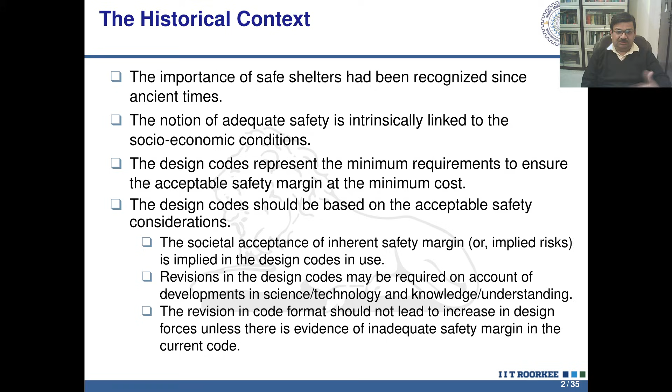So how has structural design as a concept evolved? As we know, need of shelter is as old as civilization, from the cavemen. In ancient times, the shelters were built by trial and error, and these experiences by the practitioners of the craft evolved into several rules of thumb, often based on geometric proportion, and we still use some of these rules of thumb even today. For example, the design of concrete gravity dams is still based on the middle third rule. The resultant should not pass beyond the middle third portion of the base, right? That is the no tension design rule.

So such rules of thumb have evolved over a period of time, and these rules of thumb have been codified in the form of structural design codes based on different formats. With the advancement in science and theoretical basis, formal codification took place, and that led to different design formats. For example, starting with permissible stress or working stress, then ultimate load, and the present method of limit state design.

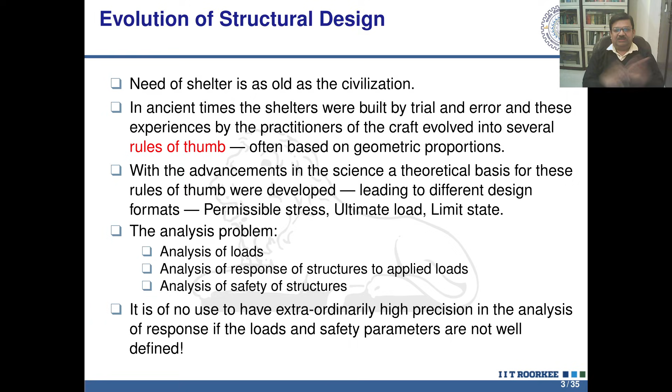So it is of really no use to have extraordinarily high precision in the analysis of response if the loads and safety parameters themselves are not very well defined. So please keep this broad framework of the state of the art in practice of structural engineering while we go along.

So the legal implications: codes are legal documents, and they are legally and ethically considered to be the minimum criteria that must be met by the design and construction community. If the owner wants to increase the safety margin, he is very well within his rights to consider higher magnitude of forces and be more safe. But codes themselves should provide the minimum that society cannot go below.

And the basis of this building code development is to safeguard the health, safety, and welfare of the public. The first and foremost goal of building codes is the protection of human life from the failure of building life safety provisions or from structural collapse. So that is the main guiding principle, that human life should not be lost. And there are two basic formats.

There are prescriptive codes that specify provisions to be incorporated to address certain specific issues. One example is our ductility details, 13920, that just mentions that the reinforcement has to be particularly arranged in this form, the spacing between the ties, how long the close spaced ties should be there in the beams and columns and so on. And it is just assumed that by doing this, somehow we will be achieving ductility of maybe around 5 or so, the global ductility at the structural level.

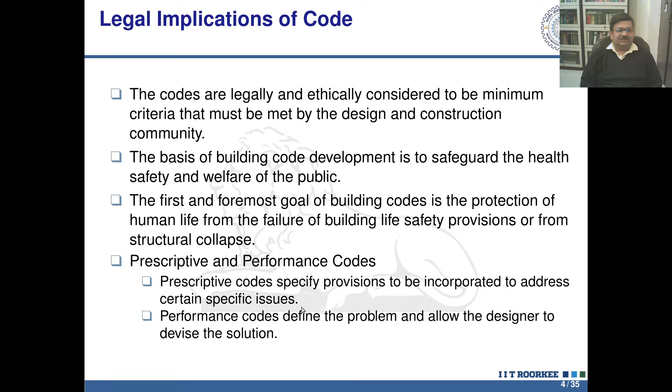And then there are other more general, more open-ended codes which define the problem and then define the broad framework, and then designers are allowed to devise their solution as long as they meet the criteria, that is, the constraints that are specified. So that is performance based codes. So now how do we go about? So safety margin, we talked about the society acceptance of safety.

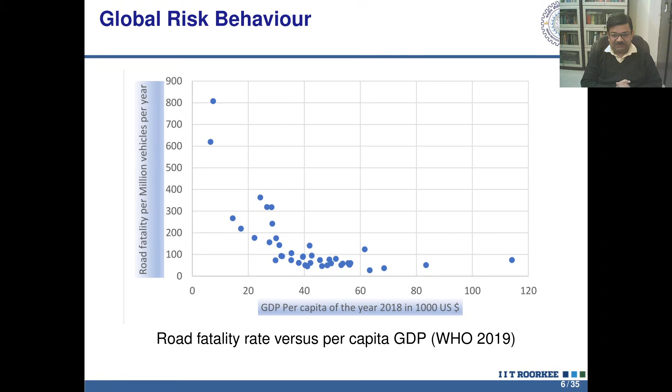And by accepting this high risk, we reduce the cost of living, which is reflected in our per capita health expenditure. Everything is cheaper. If we accept more risk, everything is cheaper. I mean, we can even get prescription drugs over the counter without giving any prescription to the pharmacist. Very common practice. I just want you to appreciate this fine point. What is the acceptance of the risk in our society, Indian society?

So now we come to the design problem. As I said, the problem is to provide a safe shelter at minimum cost to the owner. The notion of safety is, first of all, the strength criteria: factored resistance should be greater than factored load. Right? So that is the basic limit state design. And then, after we satisfy the strength criteria, we apply the service check condition that the deflections or drifts or whatever deformations should be less than the allowable deformations.

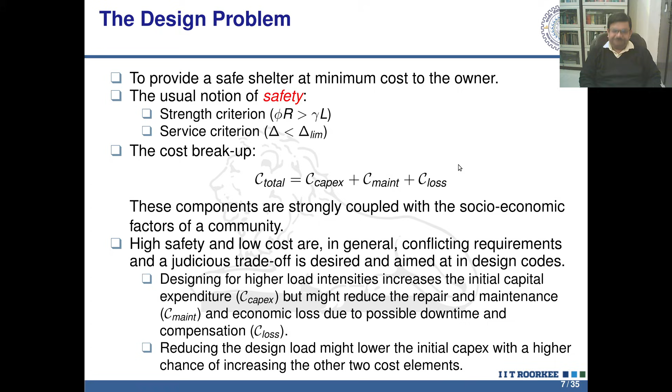Now, a lot has been made about the revision being the first step towards performance-based design. So I need to put this in context. Performance-based design, as far as earthquake resistant design goes, is essentially specifying extent of damage because earthquakes are of different shapes and sizes. So it is not possible to expect the same performance against all possible earthquakes. It is not economical. It does not make sense.

So the idea is we can specify different performance levels in the form of acceptable damage. So very frequent earthquake, no damage. Moderate earthquake, some partial damage. Very large earthquake, rare earthquake, significant damage but no collapse, and so on.

And as the facility becomes more and more critical, we make tighter specifications towards the performance in terms of damage control, controlling the damage, and essentially, damage is defined by the drift, lateral drift. So drift control mechanism. So what should be the drift measure for different intensities of earthquakes? So this is what performance-based design should aim for.

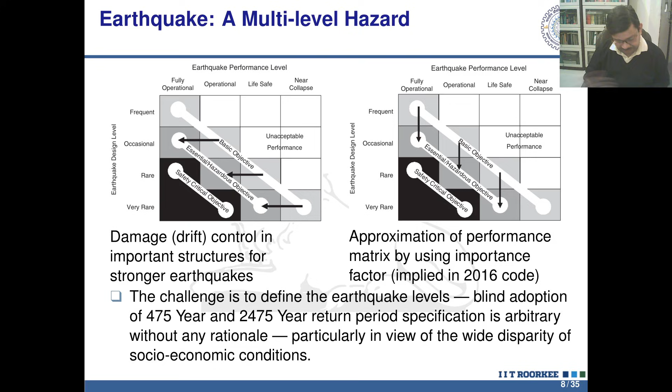So now we come to the comparison of the seismic zoning maps of 2016 and 2025 that we have. So the most obvious difference is the increase in seismic zones from 4 zones. We have now come to 5 zones, ranging from zone 2 to zone 6. And just to compare the basic seismic coefficient that we use for design for normal structures, now the definition of normal structure has also changed. That's the fine print. While normal usage of a residential building was for buildings with occupancy of up to 200 in 2016, in the 2025 version of the code, that has been limited to occupancy of only 100 residents.

So 100 residents, what does that mean? About a 4 or 5 storied building. If you go more than 100, the force levels increase by 20% more. Right? So this is for normal, so apple to apple comparison. So I'm just comparing these basic design coefficients to be multiplied by the seismic weight to calculate the design force, base shear.

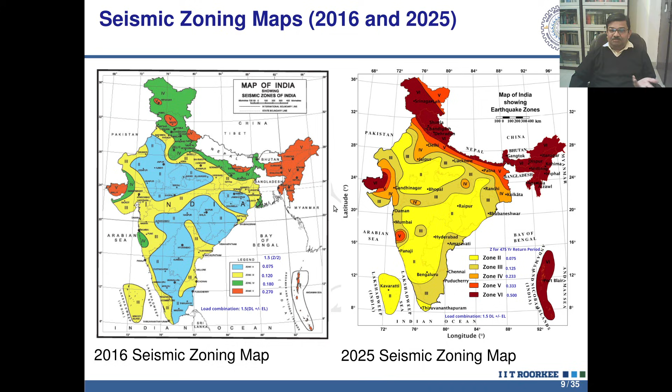And by doing this, all the buildings which have been designed according to the 2016 version of the code are now deficient. How do we repair? I mean, do we really need to repair? And who pays for the repair costs, upgradation cost, and what is the rationale for those imposing that demand?

So different intensity of earthquake hazard is now specified in terms of return periods, but the performance specification is still in strength terms, as I mentioned. So all this return period business has done is replace importance factor with return period. That's just a cosmetic change. Practically nothing in terms of performance based design.

Absolutely nothing. Performance based design requires control of a measure of the damage, measure of the drift, what extent of drift is permissible for which return period or which particular event, for different structures, configuration or use type. There is no such specification. What was done till 2016: higher forces were used to design more important buildings. Just replace those higher importance factors with higher return period intensities. That's all. Nothing actually changes on ground.

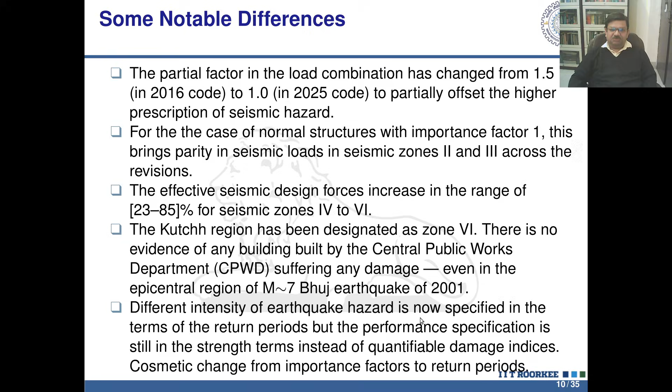So reading between the lines, seismic hazard is prescribed in terms of the ground motion parameters. When we talk about the design of the structure, what is of interest is the structural response to this ground motion. And a distinction should be made between exceeding ground motion threshold and exceeding structural response threshold. These two are distinct. That's why I will take a small detour to discuss the dynamic response of structures and how they depend on ground motion characteristics.

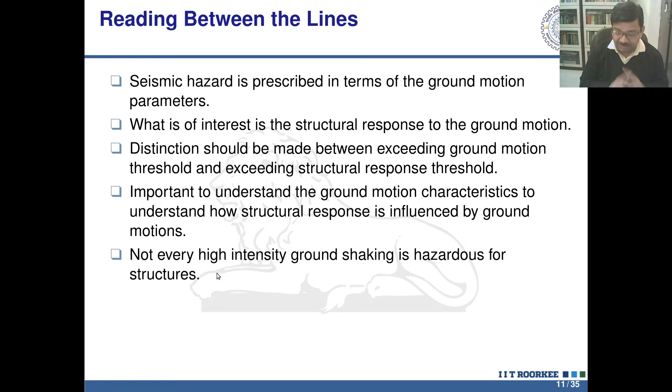So it is important to understand the ground motion characteristics to understand how structural response is influenced, and most importantly, not every high intensity ground shaking is hazardous for structures. Please note this line. Not every high intensity ground shaking is hazardous for structures.

So ground motion characterization, essentially any dynamic excitation, requires three macro characteristics for specifying the load. One is, of course, the intensity. Second, because it is dynamic loading, frequency content is also required because there is a problem of filtering. Some frequencies are more damaging, and some are less damaging to a particular structural type. And then the duration of the ground excitation. If something lasts only a very short time, the structure doesn't really respond. So persistence of ground shaking is also important. I will explain this in a short while.

These three macro characteristics are governed by the physical parameters of the earthquake process, that is the source mechanism, whether it is strike slip fault, thrust fault, subduction zone, plate margin or intraplate, and so on. The magnitude, distance, site conditions, etc. All these factors combine to generate the motion at site.

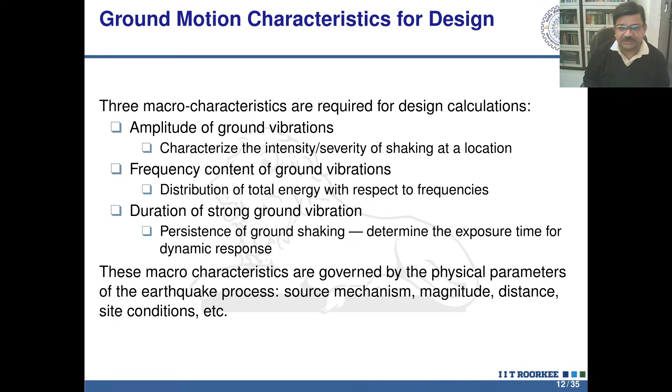So just to give you an idea about earthquake ground motion, this is an accelerogram recorded at Gopeshwar during the March 29, 1999 Chamoli earthquake in Uttarakhand. A near field earthquake; Gopeshwar is less than 20 kilometers from the epicenter. These are the three components: longitudinal axis of the instrument, vertical component, and transverse axis. While the record is about 25 seconds long, the critical phase is only about 5 seconds.

That's all. If the structure survives these 4 or 5 seconds, that's all we need to worry about. The structure will survive the rest. These are the ground acceleration traces. We can measure the peak ground acceleration, about 0.38 g in this transverse component, and a very strong lurch here. So this is a near field event. It has all the characteristics of near field ground motion, strong pulse behavior, and so on.

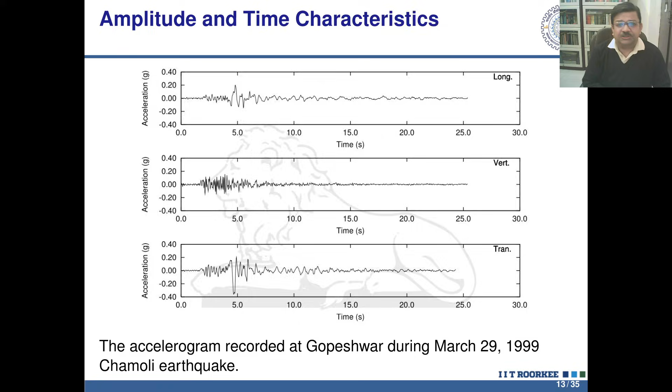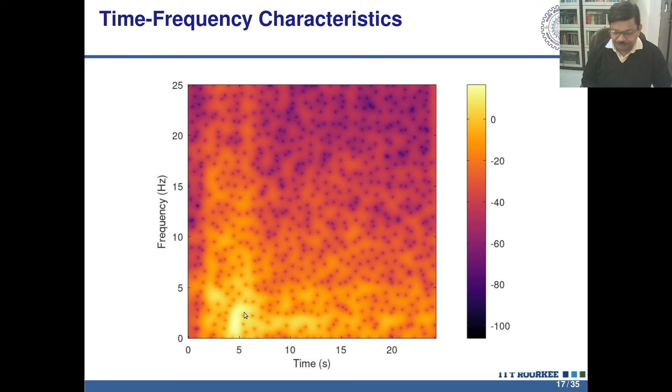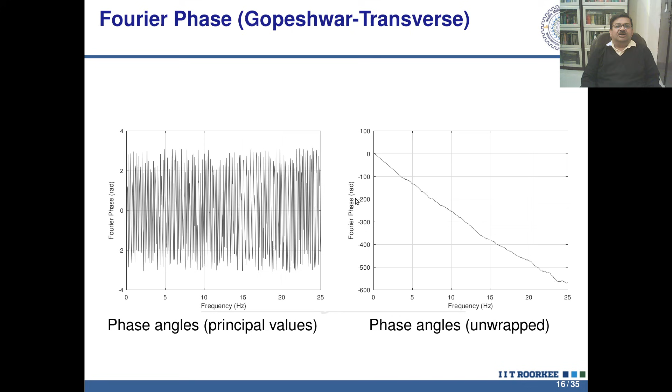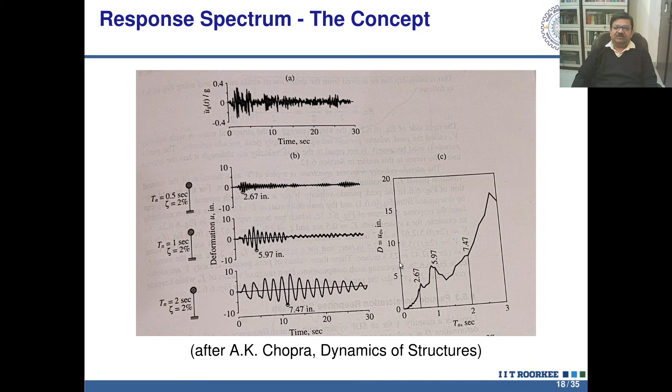So this gives us the maximum response, and that's a very handy tool for dynamic analysis because it gives us a very quick way. I just estimate the natural frequency or natural period, and I read what is going to be the maximum response of that structure to a given excitation, and then work out the maximum force in the column or springs, because I just have to multiply it with the spring constant to get the maximum.